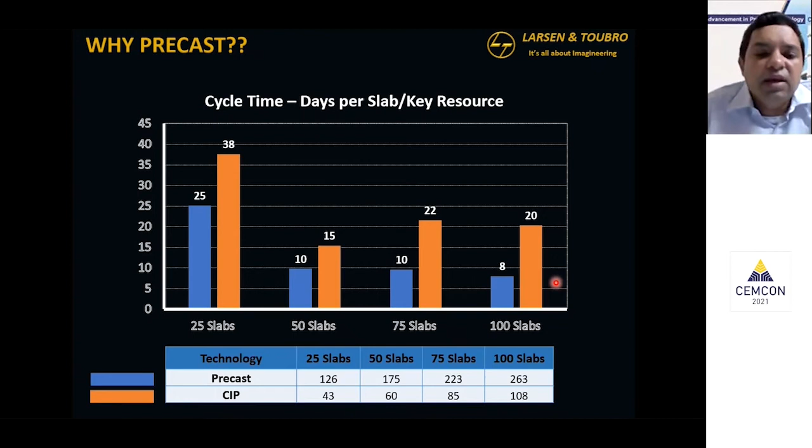What I would like to drive now is as the project has progressed, if you see conventional, usually that initial curve dips, drops, and kind of settles. And here, based on the actual COVID challenges, sometimes it has gone up also. But if you see precast, it has dropped drastically and then maintained. This is where those workforce challenges that you see at site level become less important, because once you start getting your factory productivity and all, the site challenges are less, or the site impact is less. And this is one of the key reasons why we are pursuing precast technologies - I don't want that risk of site challenges.

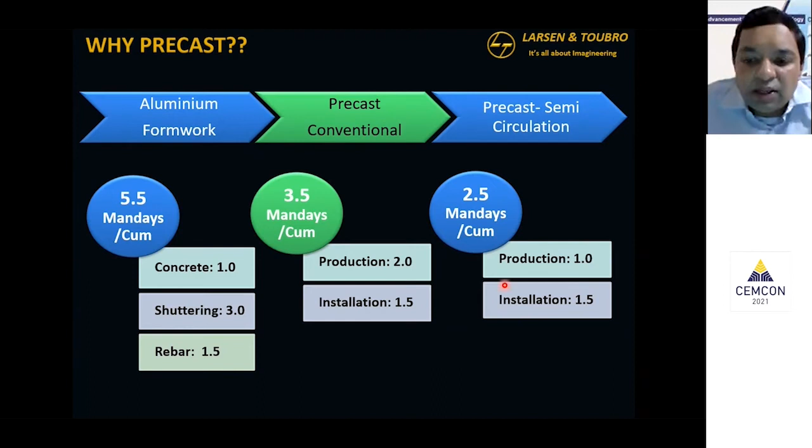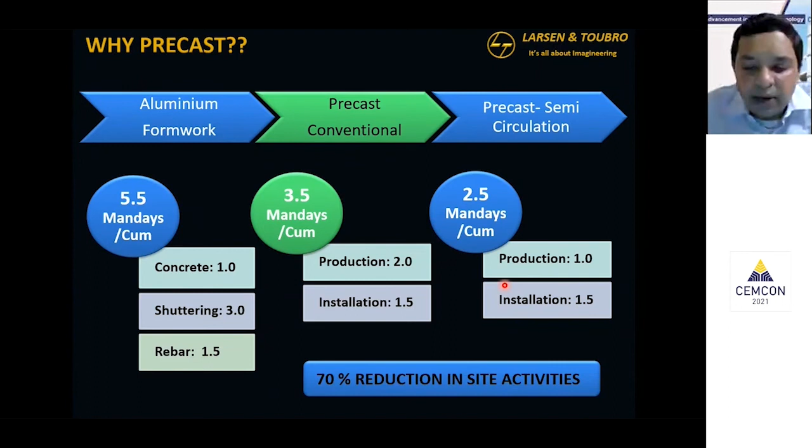If you see this other productivity metric, with aluminum formwork I'm looking at about 5.5 man-days spent per cubic meter. And of course these numbers, like 3.5, 2.5, they are better - because you are putting the technology at work, because you're putting a huge factory expense. But what we want to see is that all of this 5.5 is spent at site, whereas in these other options, only a portion of it is at site, and everything else is usually done at the factory. So again, my risk at site is what we want to reduce. The overall reduction in site activities is the goal, rather than the blanket floor cycle time metric.

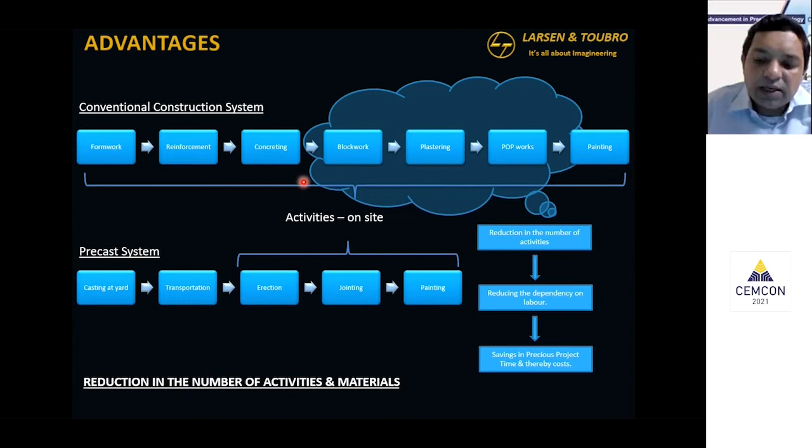This is the typical activities you see in conventional construction methods: formwork, reinforcement, concreting, then block work, plastering, pop. This is a pretty conventional cycle. In both aluminum formwork and precast, we try to eliminate workforce-intensive activities. Since 2002, with the aluminum formwork system, we have avoided these activities. With precast, whatever cumbersome activities are left, we do at the factory. So with that background, why precast? This is the picture.

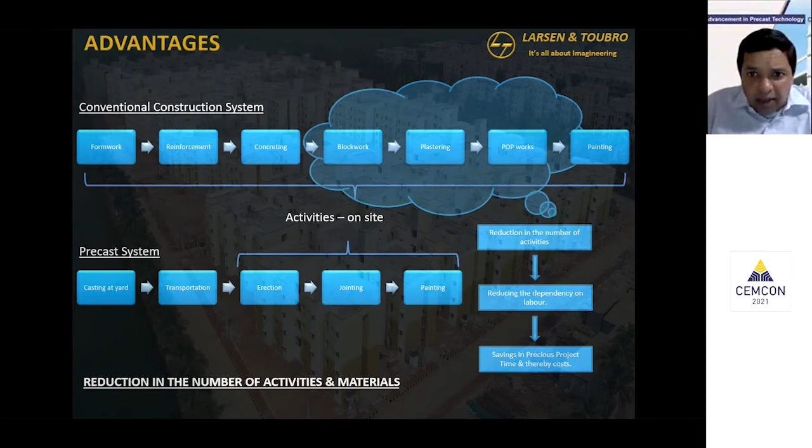This is the volume we were looking at when housing for all came in 2014 - mass housing with multiple buildings, generally of the same types, not many flat types, just huge volumes. This is from AP actually. That project included 1 lakh houses in about a span of 3 to 4 years. This is the kind of project where we look at precast technology or any mechanization - mechanization and automation is where the speed comes in.

This mass housing challenge is nothing new. We have seen this outside - our neighbors Singapore, Shanghai, Tokyo, Hong Kong, everybody has done this. They have gone through that system and built excellent public housing systems. What we are looking at is the time frame. All these have done it in 20 to 25 years, whereas we are looking at a time frame of about 7 years when it was announced, but let's say 7 to 10 years.

The other aspect, especially in residential - if you see example Mumbai, we are actually doing the latest and greatest already in the infrastructure sector. We are doing precasting that others have done for long. In Mumbai now we have high speed railway going on one side, the coastal road, the Trans Harbour Link project, metro construction. If you look at all these projects, precasting has become the core, and that has worked well.

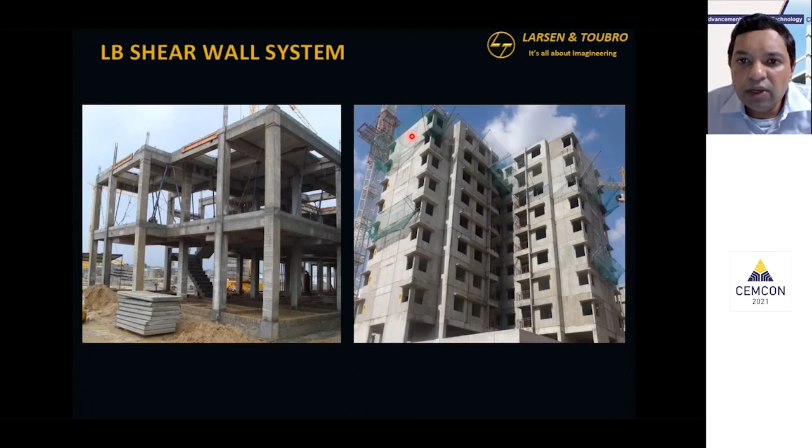The other thing about using automation and mechanization is your activities at site. If you see this picture, in the conventional system, once the floor cycle is done, only about 50% of the work is done. On the versus side - precast or aluminum - when my floor cycle is done in 8 days, 90% of the work is done. Right now in this building, externally only painting and internally only finishing is left. So that is what is driving us.

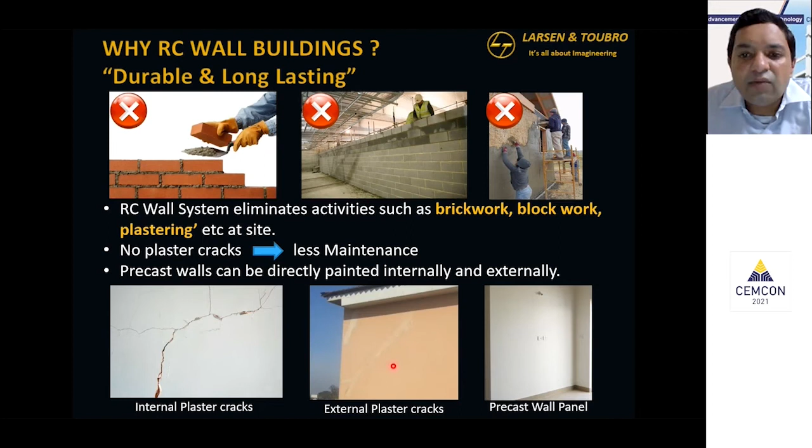From the end user perspective, all these systems avoid plaster. The one point I'd like to deliver is that from the end user perspective, all these modern technologies eliminate internal and external plaster. For us it's faster work, but the plaster was never meant to be a lifelong element - it's a sand cement mortar, it doesn't have inherent strength. You start seeing issues 5, 6 or 10 years down the line with cracks, maintenance, paint fading. All those issues are not going to be there in the construction systems we have selected.

We built three more buildings here, so about 2,000 flats were built. The building won several awards also. This was started in the 2011 time frame and then handed over around 2014.

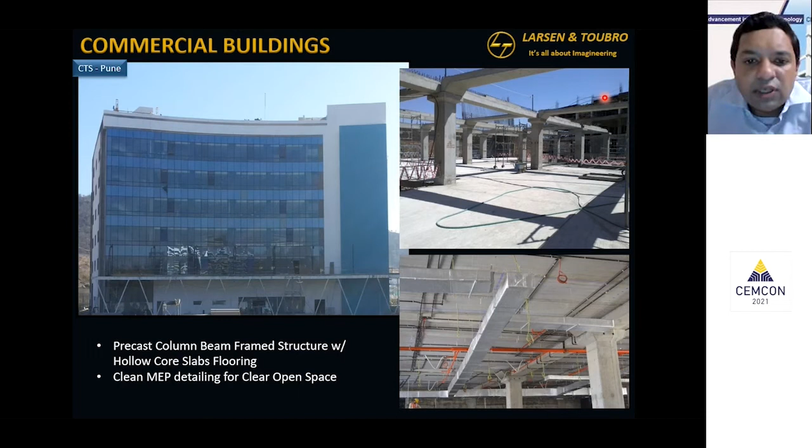This is one of the recent projects in our IKEA warehouse in Navi Mumbai. It's a hybrid structure, with steel columns and hollow core slabs to make out the floor.

What is unique is each slab is about 16 meters long, with a warehouse industrial load of about 750 kg per square meter. This is one of the longest and deepest hollow core slabs in the country, a 400mm thick slab that was cast.

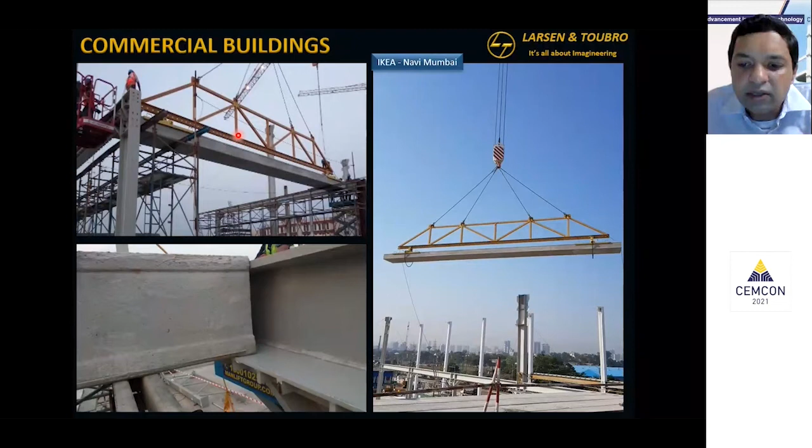So with this background, where will we go? This is the crux of the presentation today. In short summary, this is where we see the entire industry now going. There's no particular technology over the years that we feel will govern or dictate, but the hybrid technology and the prefab or pre-finished concept is probably here to stay. No matter which technology you use, everybody will be focusing on less work at site and combining systems so you get the net benefit of the overall system, without getting stuck to a particular system.

In general, market-wise, if you look at this S-curve, this is your low-rise market, which is G+1 to G+4 houses, where we are already exploring 3D printing. We have approvals and will be getting into that space—maybe by April or May we'll have our own setup actually printing these buildings. We are comfortable doing aluminum formwork in that space, but 3D printing is going to be the newer system. Same way, if you go mid-rise, we are doing precast now, but will be shifting towards PPVC, the volumetric construction, where you finish everything at the factory and erect it.

And if you see the high-rise sector, we are doing the jump to climbing formwork, which will stay. But the facade, which is usually the challenging system, we may go to precast facade or prefabricated facade systems to cover these buildings. So along those lines, we have to think and see how we go about it.

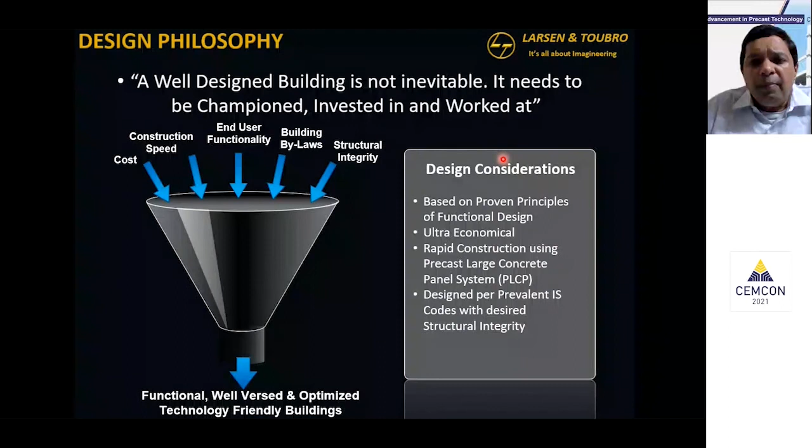Getting into the design—how we do design—we have to look at it as a holistic approach. L&T has that strength where we have our own in-house design department, not just structural but including MEP and architectural. We also have the construction method services team, so that one single point of contact gives you the entire solution from land development to actual construction and handing over of the buildings.

From the design perspective, we look at two systems in precast. One is the large panel system, what you see in the picture, which we usually use for residential construction. The other is the framed system, which is what I showed in the commercial projects—usually precast beams, columns, and then hollow core slabs or double T's, the long spanning system.

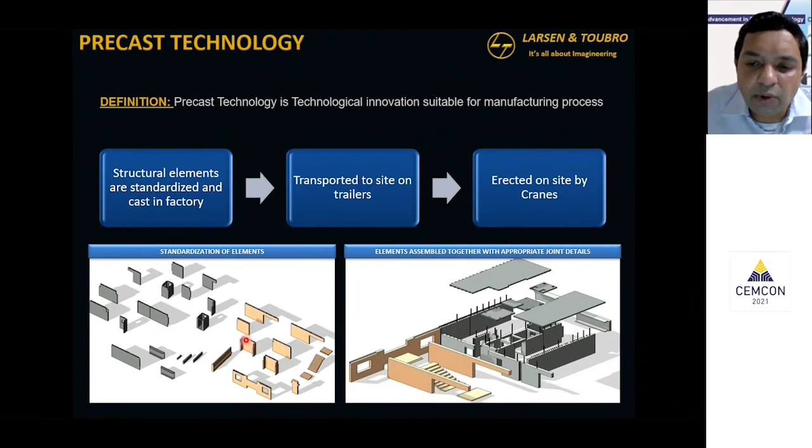Once you decide that system, your work is fairly straightforward—it's not rocket science, you just split your elements. For floor plans we don't have much luxury; residential especially has its own taste. Outside projects are very simple—buildings are usually boxy, modular, in grid. We don't have that luxury, so we worked with it knowing our buildings will be complicated. We look at complicated elements, break them into two-dimensional elements as much as possible, produce them at the factory, and then erect them.

With that basic framework, a lot of times designers or clients will ask: how much precast should I do, what should I do in precast, whether I get the benefit or not. Looking at those questions, as engineers we try to split it and simplify—so we made it into a 2 by 2 matrix: what are the benefits I get, and what are the efforts I put in? If I want high effort and low benefit, that's something like a premium—like, I have to do precast, so I will do precast.

If you have a high cost efficient system with lowest effort, that's your bread and butter type, and it will make sense. If you're low on both, maybe you're doing precast, it doesn't matter. If you're high effort and high benefit, you will have to do something like that.

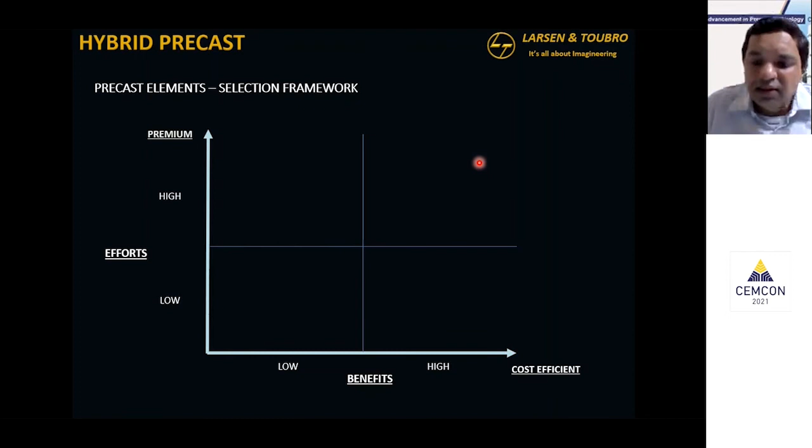So in general, if I start splitting the construction systems, this is what you will see in your day-to-day buildings, whether commercial or residential. If you have external complicated 3D elements, these are high effort elements, but you get high benefits, right? You get an easy 3D facade attached to the building and save a lot of time. Same thing with pods, stairs, or external walls. It's really worth looking at these elements and seeing if you can convert them to precast.

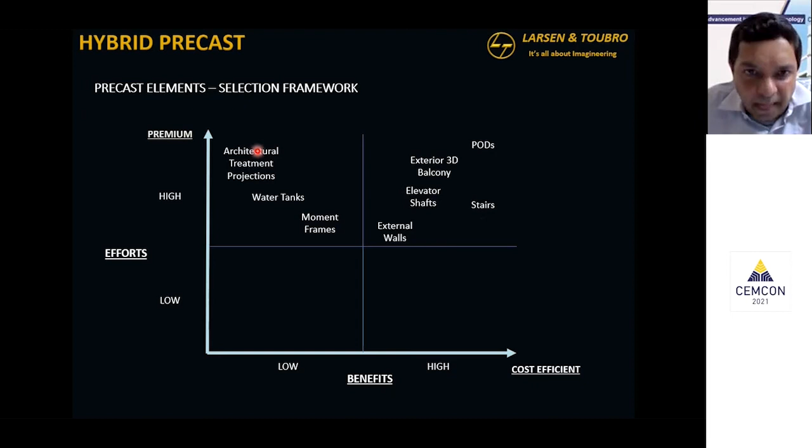If you look at architectural treatments and projections, they look fancy, but you end up with very high effort and not as many benefits. So in our Provident job, for the architectural treatment, we used an alternate material. We did not force our technology there.

Same with water tanks — there is a lot of high effort involved. You have to have a really premium drive to do water tanks in precast, which in our CIDCO projects we are doing, but for different reasons. Believe me, to build that water tank, there is a lot of extra work to make it work.

Columns and beams are very simple but offer no real benefit. Internal walls and slabs — slabs actually give you the highest benefit element from precast, where you don't have to spend as much or put in as much effort. Simple slabs give you the benefit of no formwork, and you can quickly put the slabs in, exactly like what I showed in that IKEA warehouse.

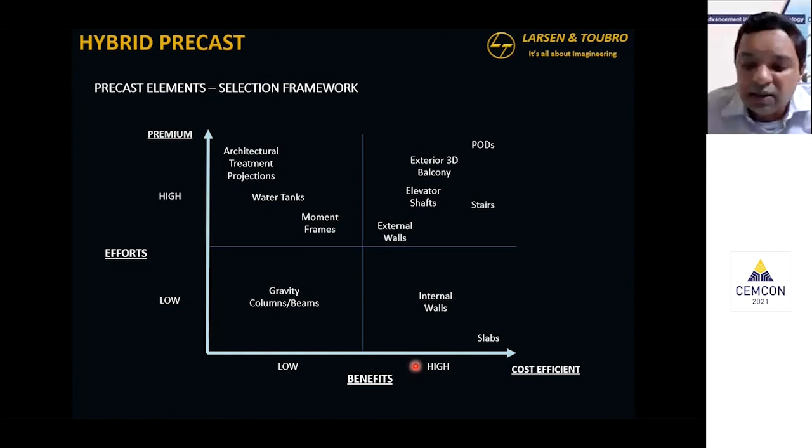There is no formwork, no false work, in long span areas — literally 50 to 60% improvement in overall productivity. So on those lines, you can make your own 2x2 matrix, see what your benefits are, what is driving you as a client, contractor, or end user, and then decide what kind of precast you want to do.

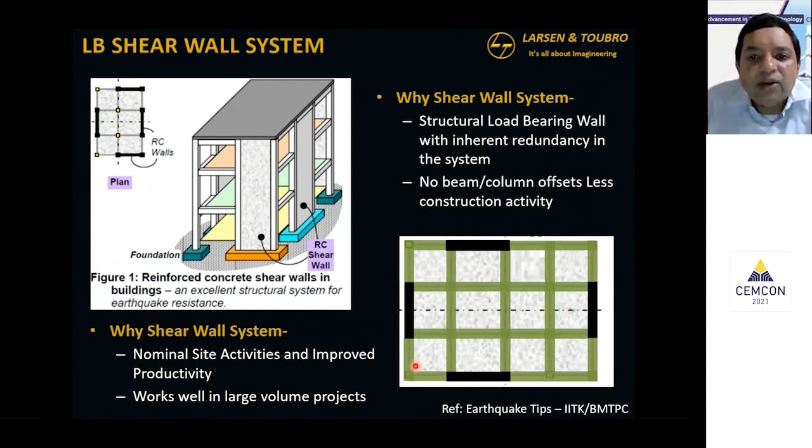Once you take that call, whether for the entire building or not, you get into your structural system. What we are doing is emulative detailing. This is one slide summarizing it for those in the structural design department. This is what we're using in India now, whether it's a beam column system or a large panel system for residential or commercial buildings. We are using the emulative approach.

The outside world has been doing bolted and welded connection approaches for the last 20 years. Before I came back to India, I didn't know what emulative detailing was. I had always seen welded and bolted connections when I started work. But maybe we'll get there one day.

Right now, where we stand, the system is working well for us in terms of these wet connection detailings. The bottom line of the emulative approach is that once your building is completed, it's immaterial whether it was done in precast or conventional — it behaves similar to a conventional, monolithically cast building. That's the kind of connections and detailing we are doing.

It requires a lot of extra effort — wet concreting takes a lot more time than welded or bolted connections. That extra effort is to get the performance similar to what we are used to, and it's a globally accepted methodology.

If you see ACI, they say the buildings will perform equivalent to your structural system. PCI takes it even further, saying regardless of any seismic region, if you are doing emulative detailing, your building is going to perform very similarly.

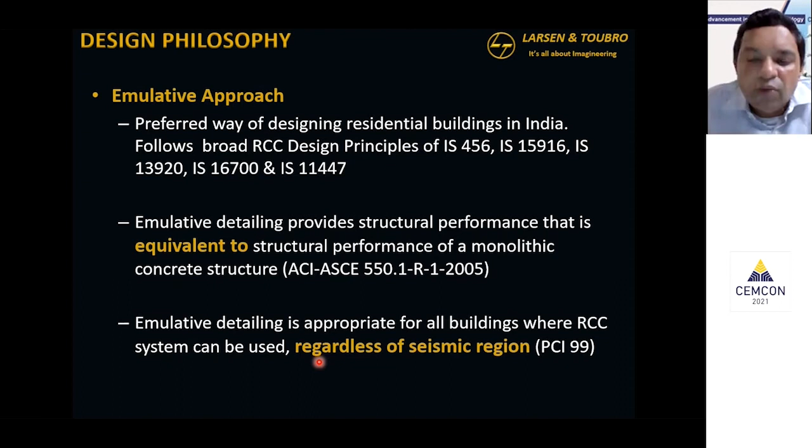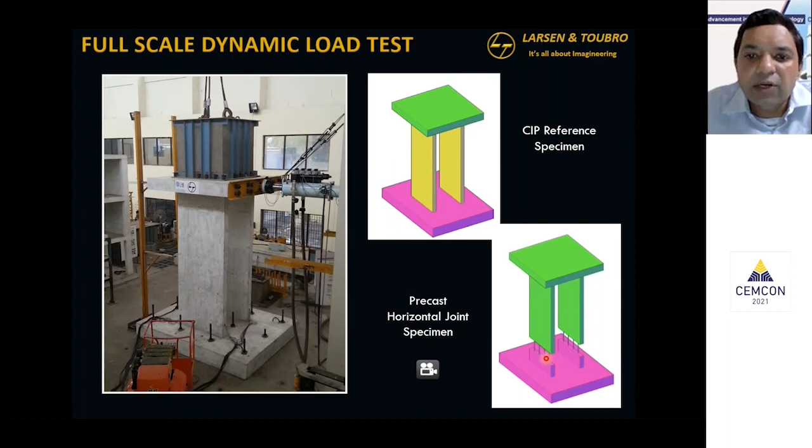And just to validate that, we did our in-house test. I won't get into all the details since we don't have time, but the entire test setup was done in India, where we validated it. This is a full 3 meter height shear wall system, pushed with reverse cyclic loads to make sure the emulative detailing performed as expected. One element was cast in place, while the others had three different joints, and we tried to see whether that emulative or similar performance was achieved.

If you look at this graph, one of the walls is your conventional wall, and these are the precast walls — so we do get similar performance. The R values, our overall strength and toughness, are similar.

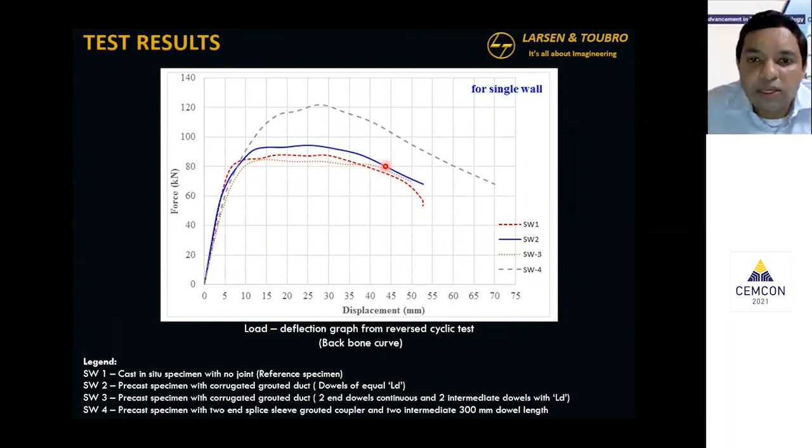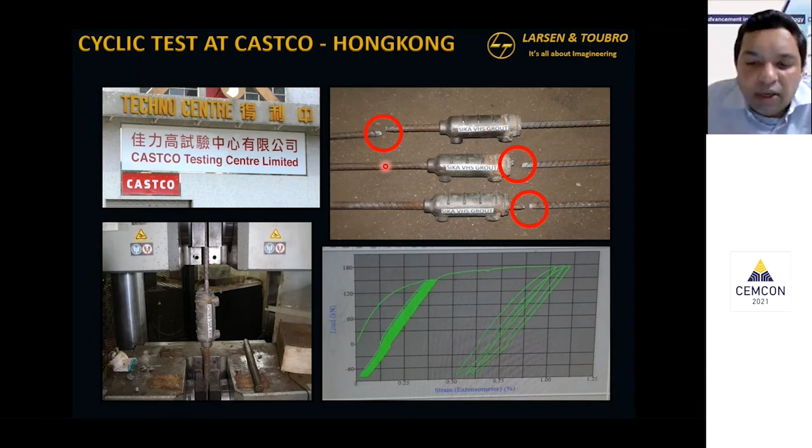Especially for the connections we use for couplers and all, that was also tested, and the couplers usually give slightly better performance. But of course, they have their own detailing issues, or it takes a little more time to build the elements at site too. So that cost benefit you have to evaluate on your own and see.

But ductility is mainly where precast usually gets questions, whether you get the same performance or not. This is actually the proof of the pudding. If you see these coupler connections, this has been tested at a seismic event of more than zone 4, and the bar has yielded, giving the ductility that you want. The connection never failed, and that's how you get that better performance out of it.

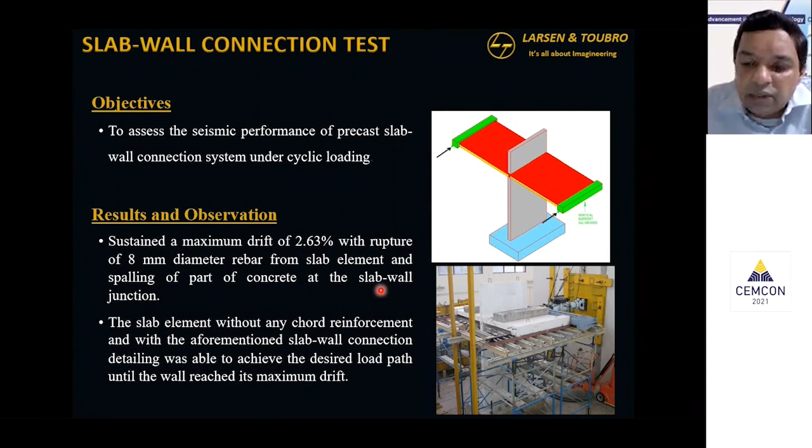On similar lines, we have done all other elements also. The entire building structure, building system, or building load path has been tested and validated for the details we are using, to show that we get satisfactory performance in terms of shear wall connections, diaphragm behavior, and connections that give you shear capacity.

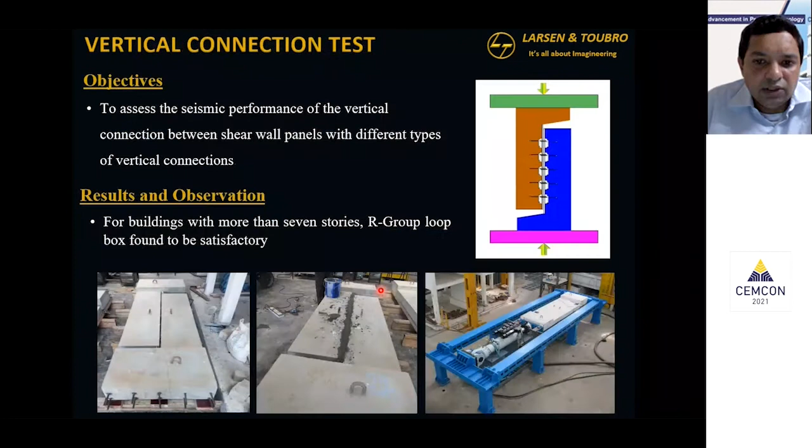Based on that, we have several technology validations and certifications in place, just so that you have that comfort. In 2012, when we were saying okay, new technology, we have to do something - from that to now, the industry overall has seen a lot in precast, and that comfort, that confidence we have is plenty there, where we don't have any issues left to deal with, especially in terms of structural or joint connections.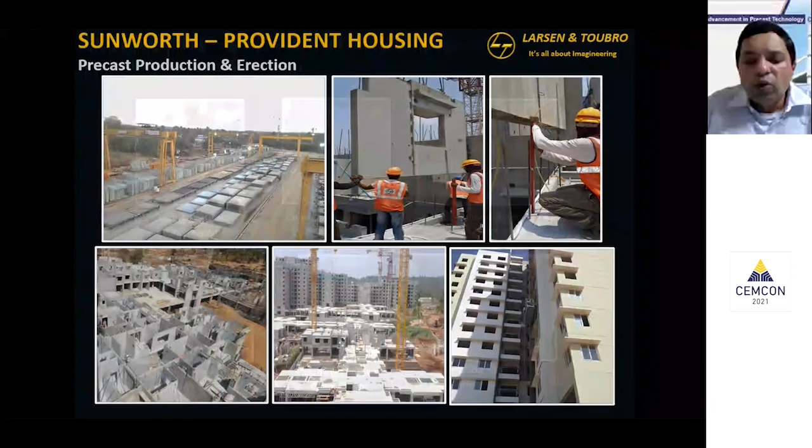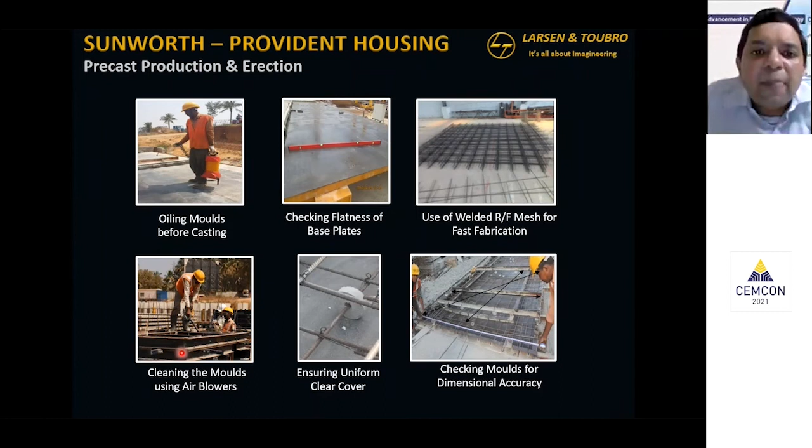Your overall quality control is going to be much better in terms of everything happening at ground, right? There is something happening on the 23rd floor versus something happening on the ground in a factory controlled environment, which is much better. As far as the conduits or your services are concerned, everything is concealed, so you get that same benefit out of it. Conduits are usually cast embedded in your PHE plumbing. Usually we provide chases so that you get access, so that if at all it leaks and all, you can access it and maintain it.

Your transportation and all is figured out. That becomes actually one challenge.

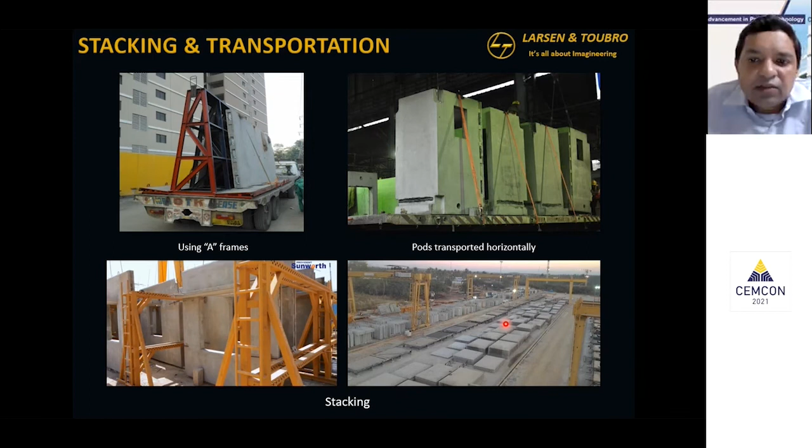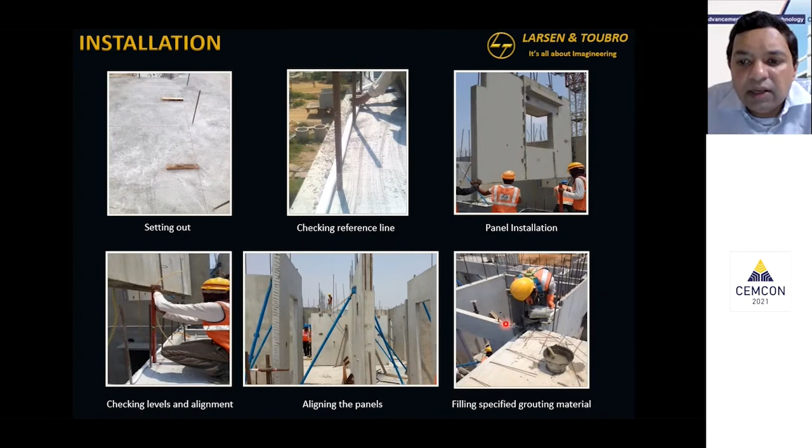Usually we avoid infrastructure challenges by setting up the factories at the site itself. So that infrastructure challenge, I don't have to deal with it personally, but it is there. Maybe in another 5-6 years we might be seeing better infrastructure to deal with the technology better. Once it goes to the subcontractor, the 10-15 gang, they know what to do, and it's very minimal work - just line level, make sure your elements are plumb, and continue erecting. It's a fairly straightforward process, as long as it's dealt with well during the design stage on paper.

I think I have about 15 more minutes, so going to another one quick. This is a very small project, but I just wanted to give the audience the flavor of how you can adopt technology.

Usually our focus is on mega projects, but every now and then you get a small scale one that fits in precast. This was one hostel building we looked at in precast - the building was G+3 because the client wanted it in 8 months, and they said if we build all 5 floors we'd be late, so just give 3 floors plus 2 extra floors. By the time we started construction, looking at the speed, they said we might as well build all 2 extra floors and not be late. So we built all 5 levels and got that structure in time. But why is it unique?

To improve speed, usually we start on the ground floor. But here, because the founding strata was low, even the plinth was taken up using precast. This is my raft - at the start, top of the raft, we directly took up precast. This plinth work, which usually takes about 25 to 30 days, was erected in 3 days, and then backfill and all in about 7 to 8 days, and the work was done. So this is where you get the speed of the technology.

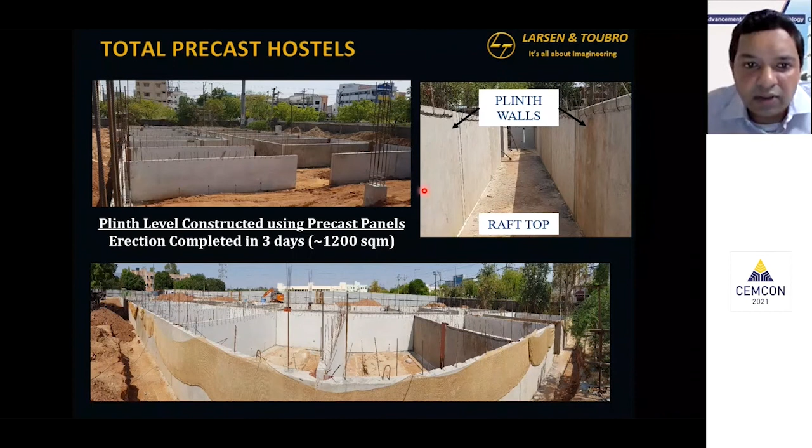Then inside the building, again finished well, you don't see it. The bottom level was a big dining hall, so the continuity of the walls could not continue. So we did a hybrid system of beam-column portal frames - this is precast beam, precast column, and then the building continued on top. So if you look at it, various possibilities are there which can be easily done using the precast system, and much faster.

This is one commercial job in Vizag. Now we are doing a substation building - this is total precast substation. This project is about 15,000 crore worth, and the substation building is about 50 crore. But the substation building is kind of the heart of the entire project - until that is commissioned, nothing else can be handed over. So it becomes an important and critical element. The client said they want it faster, they don't want the risk, so that's how it was conceived. This is one of the first substations we are doing, but going forward we will see more and more in that same space.

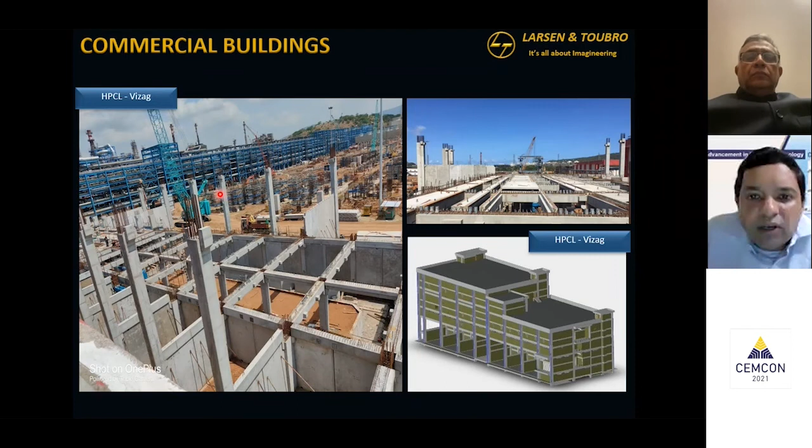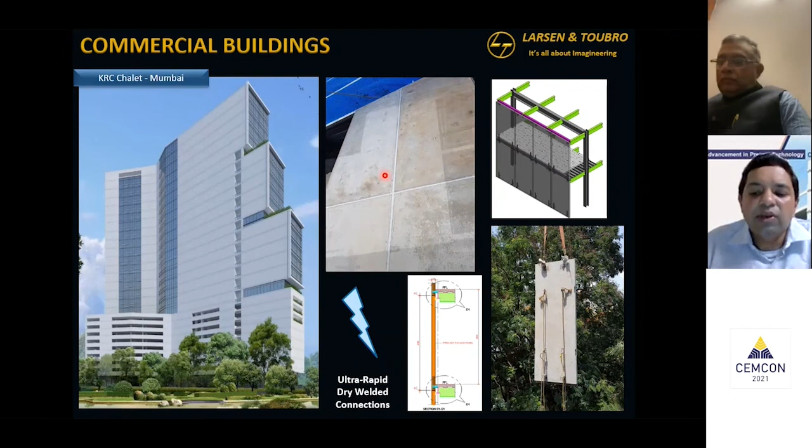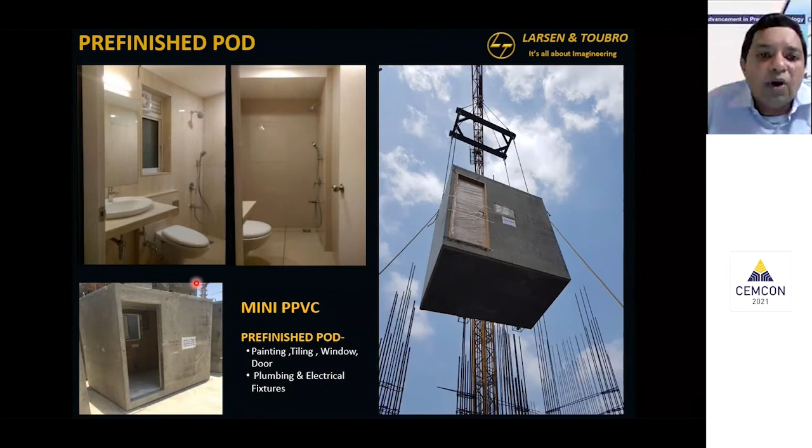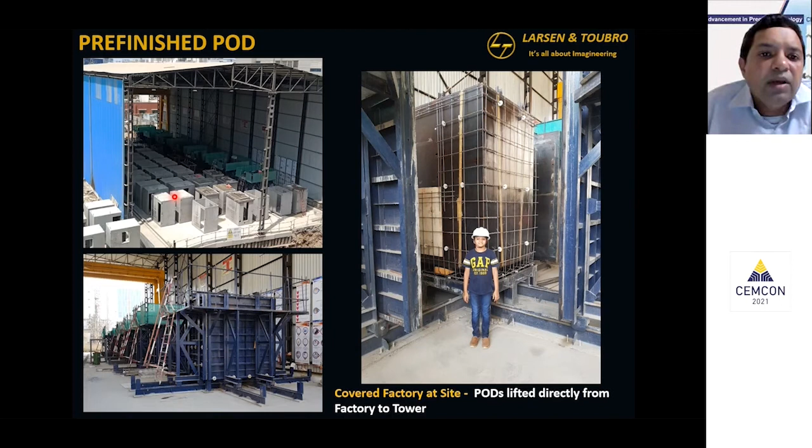Same way, here we are doing in residential this pre-finished pod. So if you see this toilet, about 10 ton including finishing, but all this finishing is done in the factory. We set up the factory right next to the job, with all indigenous molds from our own formwork department. These pods were stored at site and finished on ground, saving on the overall finishing activity at site. The toilet pods were just kept constructed with the building, and at the time of handover those were opened, with only the door attached fresh.

So with that, I think we are at the last end, maybe another 10 minutes. What we'll be looking at is overall QAQC, what we are doing, and joints. We already discussed about the structural integrity quickly and how we are doing it.

In terms of joints and water issues, what I would like to stress is, as long as you know what you're doing, as long as you look closely and detail that joint out, it is very possible and very comfortably done to have long lasting buildings which will not have water leakage issues.

In terms of the water leakage issues in general, where I stand now, my experience over the last 10 years is that in India we don't have water leakage issues in precast anymore. I have a water seepage issue, I have a moisture issue. But what we were seeing when we started this technology, where 10% of the joints were leaking and there was dripping water, that has gone. What I'm looking at now is probably less than 1% of the joint issues. Even with that, maybe a moisture or seepage issue, but there are no drastic water issues.

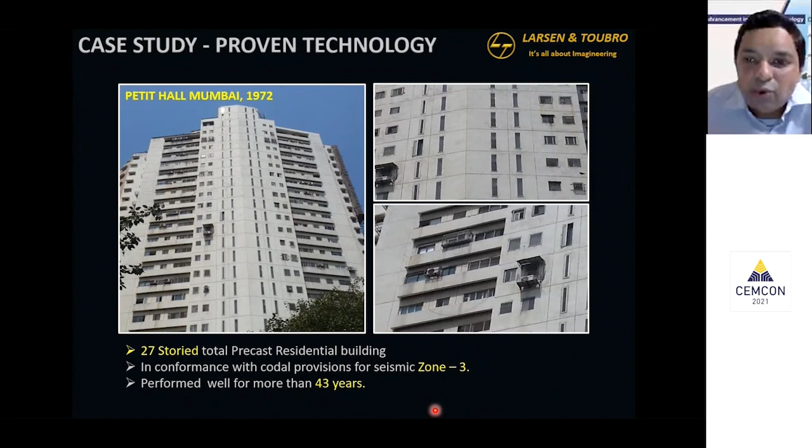The building you see in the picture here is a total precast building done by Shirish Patel and Associates in 1972. The building has been standing there for now more than 43 years without any significant issues. So if you know what you're doing, if you pay attention to details, it is very possible, highly possible, to build buildings which will be standing for 50 years or more.

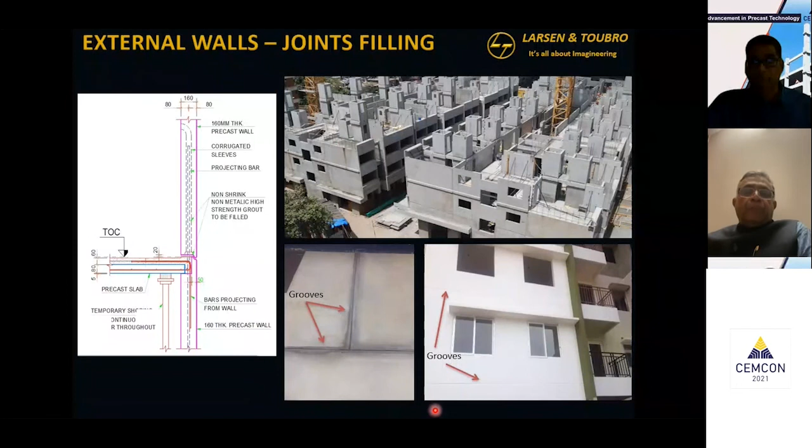So how we do it, we have also evolved over the years. These are some of the typical details, how we do the detailing, where you avoid and make sure that water does not climb up. We do waterproofing with an intent where there should not be a leakage from one room to another, forget one flat to another. So all these details we look at and finish.

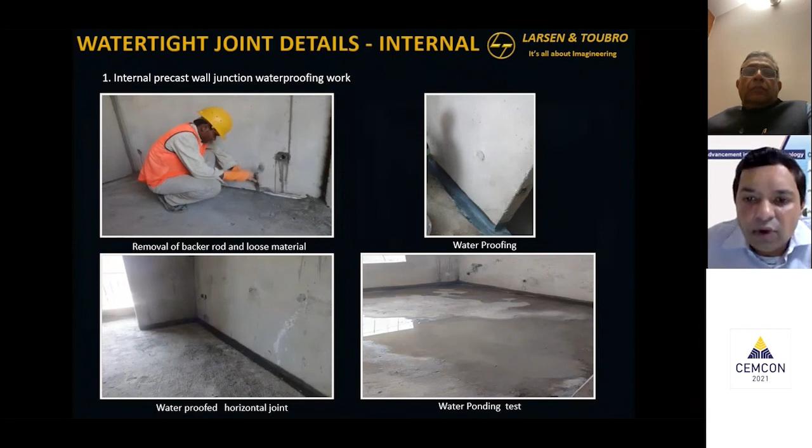After finishing, these will be tested also. About 2% of the flats, we are actually literally ponding the flats with about 4 hours of water and making sure that the vulnerable areas are found out. If there are areas with seepage, those get treated, but this is being looked at.

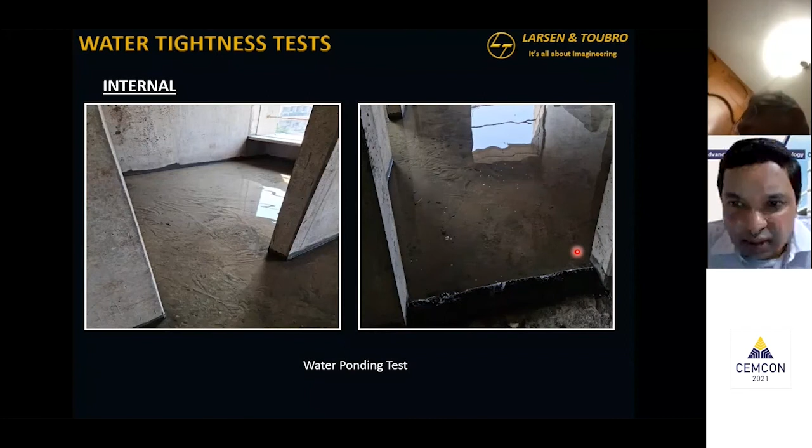So this one thing, I'll just take a minute or so, but I wanted to put it because that question keeps coming. So here's a small video from our recent project in Mumbai, where we actually pond the flats. We ponded this flat also for about 4 hours of water.

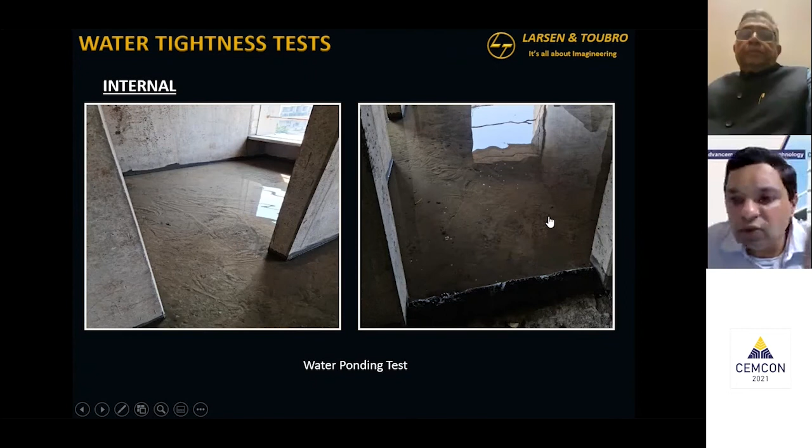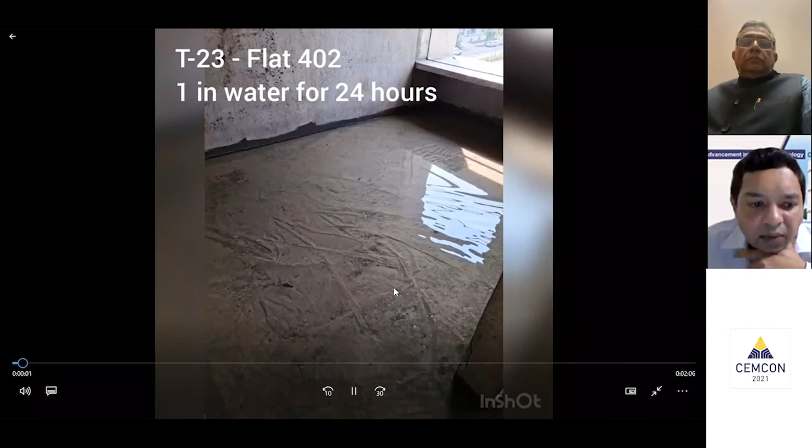And then there is a walkthrough of what you get to see under that flat, like the one level below. And this is what we are actually getting now. That's where the confidence comes from, when I stand here and say that I don't have a water leakage issue, only a moisture issue.

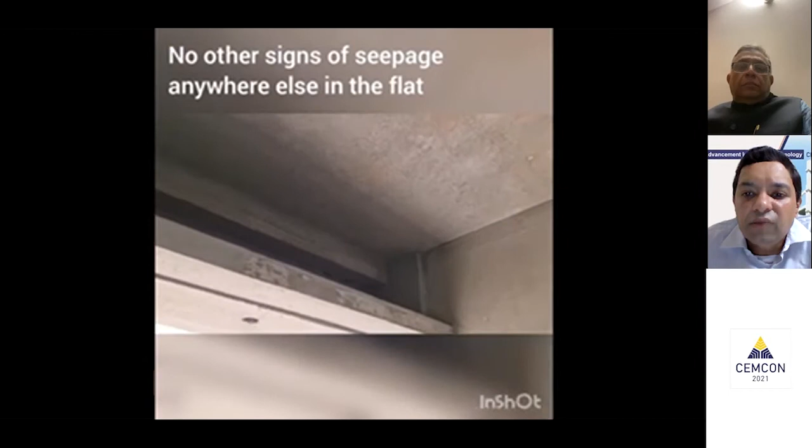The entire flat is usually flooded, like I said, for about 24 hours. That's the new norm, and this is anything beyond that. We have perfected that technology where we can confidently deliver these kinds of units. All these joints you see, this is as good as looking at a water tank below, which had 1 inch of ponded water for 24 hours.

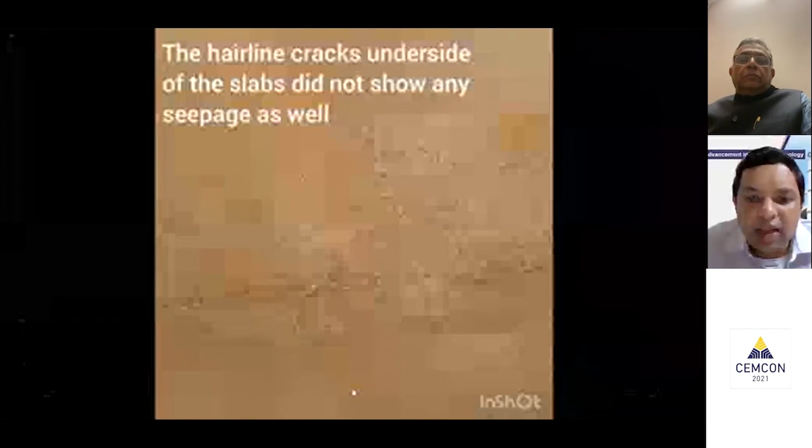This also, you see, it is very common in precast slabs to see some hairline cracks and all, because these are thin slabs, and usually everybody is concerned saying these cracks will leak and all. But once you put the topping on top of it, these cracks usually do not have any issues.

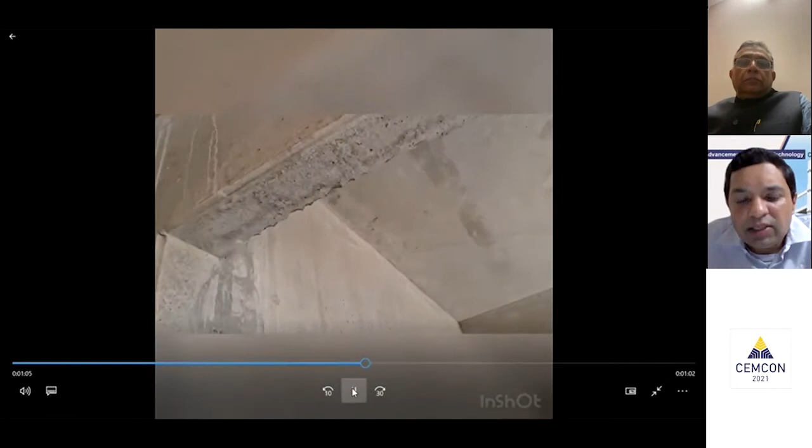So that's the entire flat going out, and sparkling. This is what we can deliver. One, attention to detail during design, and then make sure that your QAQC at site is working well, where you can achieve this kind of performance.

All right, going back quickly. Same way internal, we are doing external testing also. So if you see now, the newest code 15916, which is the precast code, has now given requirements for the external joint testing also. So the same is followed, where we do kind of simulate the rainfall situation and test the joints to make sure that they are

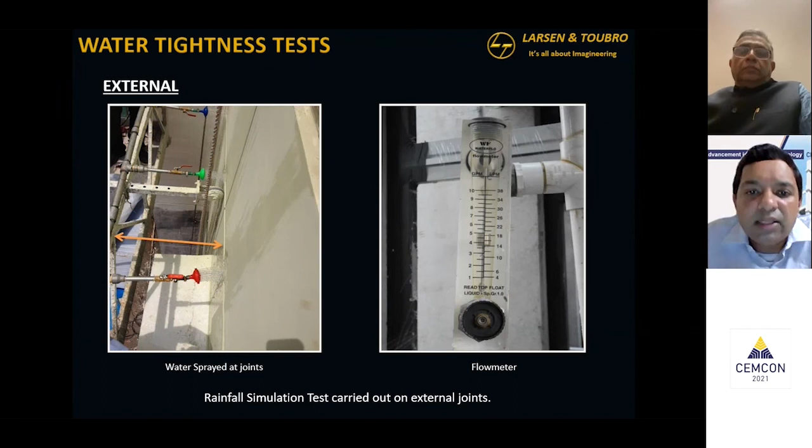as expected. Right. At the last end, I'll just show, I think the video that you saw just now is from that CIDCO project only. So this, we are building actually about 7,400 houses now. Based on all our experience, we selected precast technology for this.

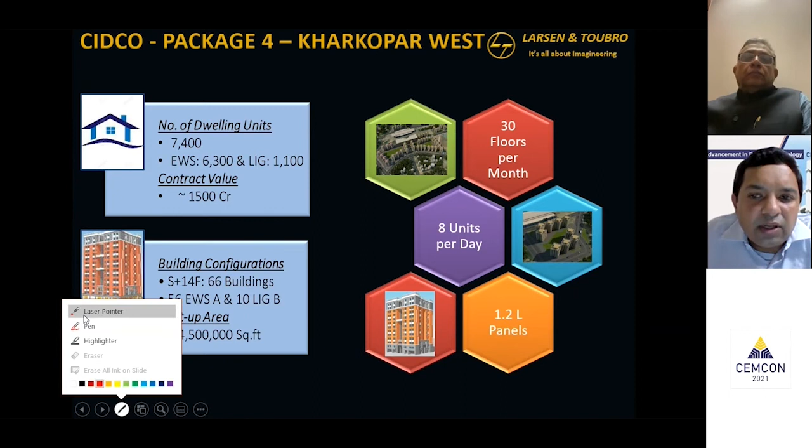Also, it was qualified by CIDCO as their preferred choice of construction. And we are looking at about 4.5 million square feet of work. The speed overall, if you look at that, we are looking at about 30 floors per month, which will translate to about 8 flats per day. So that's what we are looking at in terms of volume.

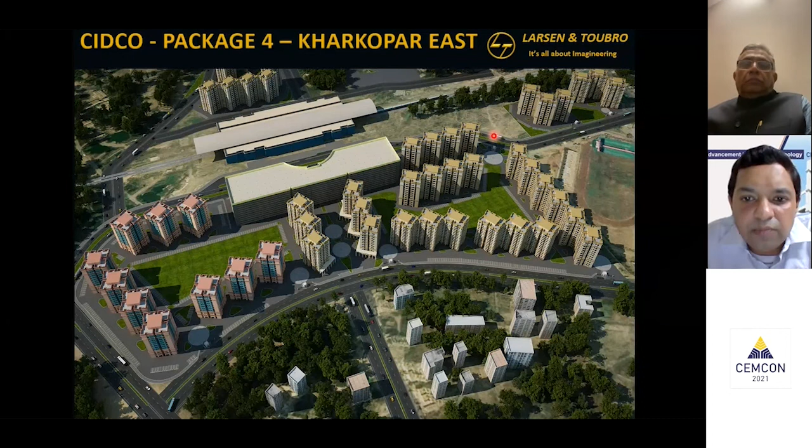This is the overall perspective of one of the plots. So all these buildings, what you see, we are building using precast technology now. The architect is architect Hafeez Contractor. So these are not your traditional mass housing type buildings. They wanted, they were very particular about their brand. So if you see there, all the grooves and reveals and projections and all that was worked out, and the entire thing is being produced in the precast system along with the architectural features.

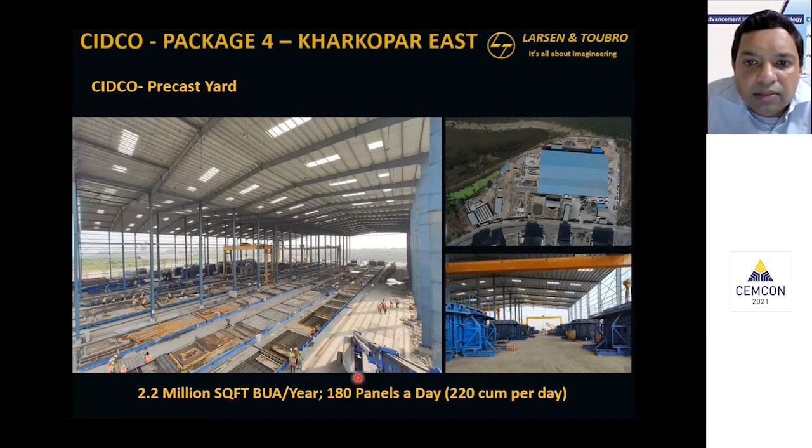This is during construction. This snap, it was built right in COVID wave 2. In starting production, about 2.2 million square feet a year capacity. 90% of the molds are built indigenous, and this is what I was showing the panel. If you see, with the grooves, with the bands around windows, everything is cast at factory. Even the first layer of paint and putty, we are trying to see if we can do it in factory and just install it at site.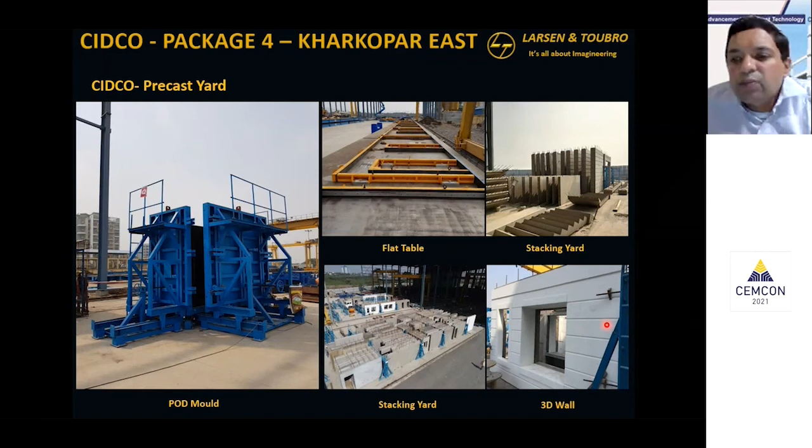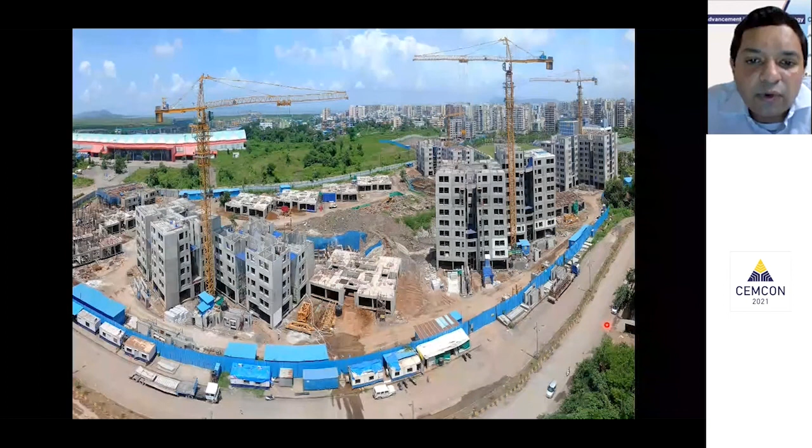This is actually the site photograph. What you see here is pretty much built in the last 7 months. So that's what we are looking at. This photo itself is about a month old photo. But that speed, what I was saying, about 30 floors a month, we are somewhere around 22 to 24 floors a month now. At the peak, we will get to about 30 floors a month using that plant speed.

And to conclude, then in the digital space, what I was mentioning - if you look at this project, whatever I mentioned, 4.5 million square feet, it broadly translates to about 1 lakh elements. And it's a huge amount to deal with in terms of your planning, logistics, and all. So what we had previously,

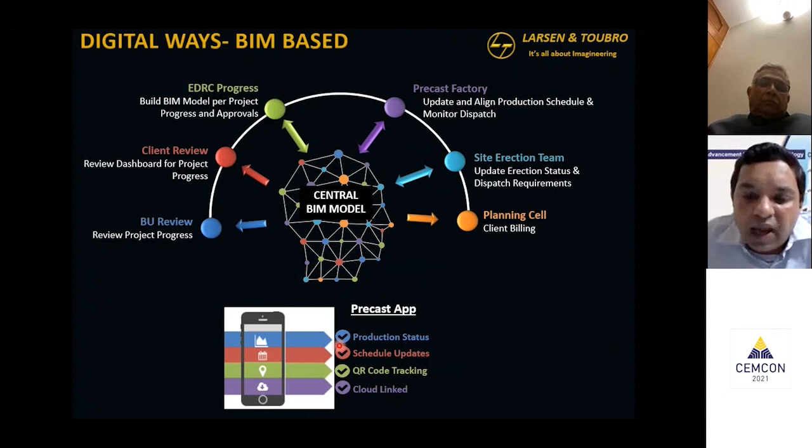Excel based planning and all will go for a toss if you want to kind of track these many elements. So right from the project start, we are now full-fledged using BIM for all, most of our projects anyway. So there is a central BIM model for all these towers, and based on that BIM model, now we have our in-house app also that kind of tracks each element status-wise, right? So from the BIM model, I am already doing the modeling. If you see all the reinforcement of these panels, everything is modeled in that BIM model, right? All my 2D drawings are generated out of this BIM model now. There is no more 2D drafting going on.

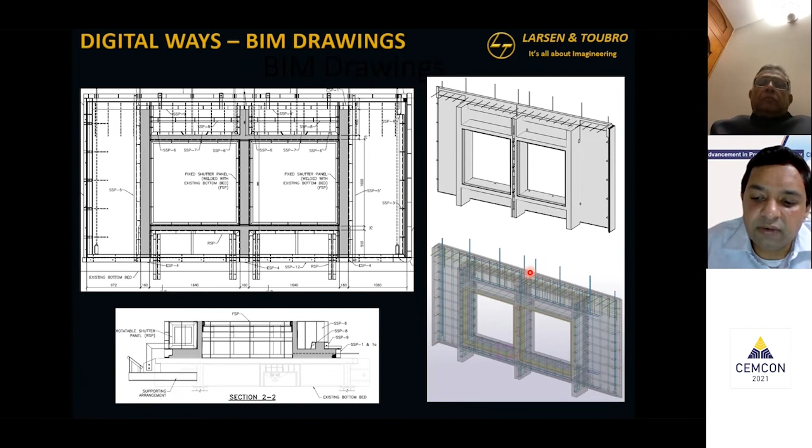And once you have that in hand, then we switch to the site digital action, which is our app. Then right from the start of that project life or element life cycle, when the bed starts, we know that this element is being cast. Then at what time it was cast, how much time it took to get to the concrete stage, when it was demolded, what was the strength at the time of demold, how long it was in storage, when it was transported, when it was erected at site. I have a real-time snapshot using that app. That's where the digital advantage we are looking at is.

Usually what used to happen in traditional tracking is by the time the issue is flagged, it becomes 2 or 3 days delay already, because someone is going to input punch in that number the next day morning, look at it, then they realize that's a problem, they will email it, then people will start looking at it.

If at 8 o'clock in the evening the element is installed, it gets scanned and reported saying that element is installed. If it was not, it gets flagged also. So I get a real-time snapshot throughout the project all the time out of whatever that 1 lakh elements, how we are doing on each element.

Same way, tower progress also. We get to know using that app how many towers are doing each floor, at what percentage it is, and everything is being tracked real time. So that's the digital advantage.

And then lastly, to conclude, where will we go? I know I've been rushing a bunch of things, but feel free to contact me if you have questions. With all this, last 8, 9 years, where will we go? I just wanted to show some pictures we have done in India, and before coming back to India, I used to work with the precast sector.

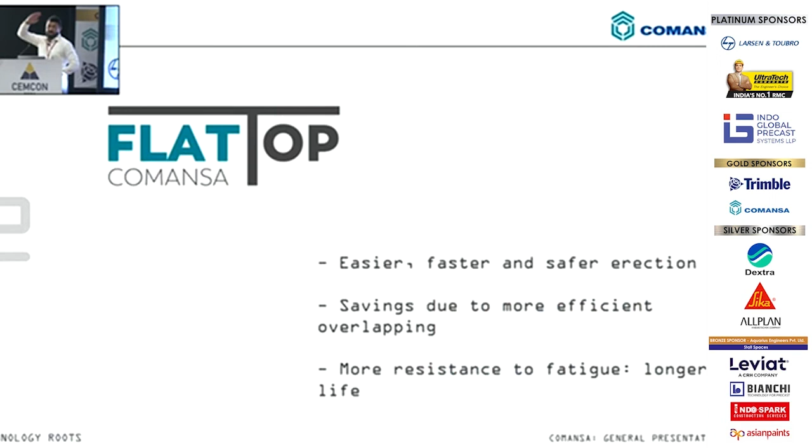As I mentioned, Comansa is the pioneer of flat top technology in tower cranes. Flat top cranes have a lot of advantages over hammerhead cranes, or cranes with a cat head where the main jib is supported by slanting ties. Flat top also allows part-by-part erection and dismantling with the smallest possible mobile crane.

Also, the challenge of tackling higher capacity panel weights is quite significant in precast concepts. Hence, in precast concepts, only smaller capacity jibs are used to tackle the heavy panel weights. Being a flat top, if a few cranes are working in close vicinity to each other, they can overlap with each other at the shortest possible heights.

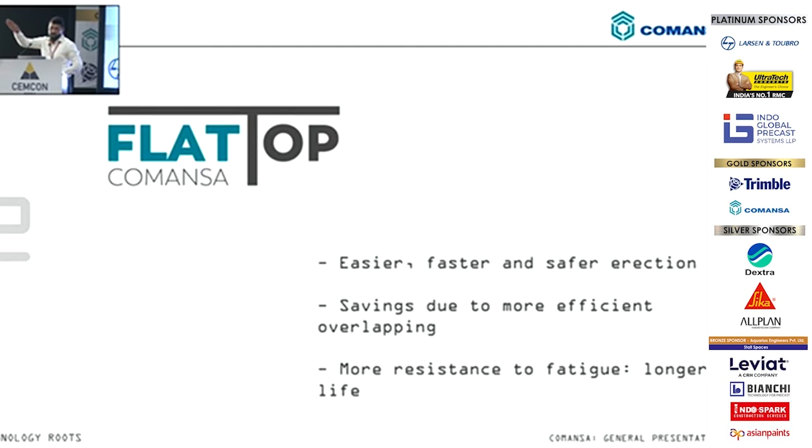This is about more resistance to fatigue. As you may know, in cranes where the jibs are supported by ties, the portion of the jib just beyond the ties is most vulnerable and experiences the most impact while lifting heavy loads. But since a flat top crane has no tie, whatever load is lifted at any span, the impact is borne by the entire jib length rather than a particular section beyond or within the tie bar.

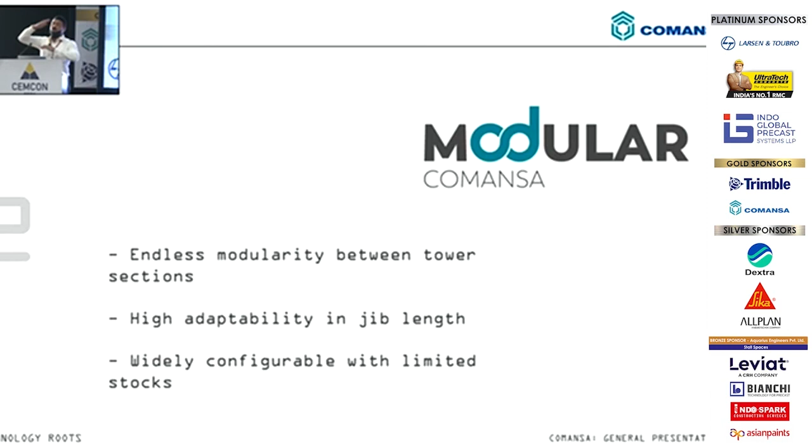Also, the advantage of Comansa design is greater interchangeability of mast sections as well as jib sections. If you have a 10-ton crane and tomorrow want to reconfigure it to a 16-ton crane, with minimum change of panels and jib sections, you can convert your existing 10-ton crane to a higher 16-ton capacity crane. These are the common advantages of Comansa flat top tower cranes.

Quicker and safer assembly. Storage is easy because all the mast sections can be further sub-dismantled into panels, so more panels can be transported in a single flatbed trailer, saving huge transportation costs.

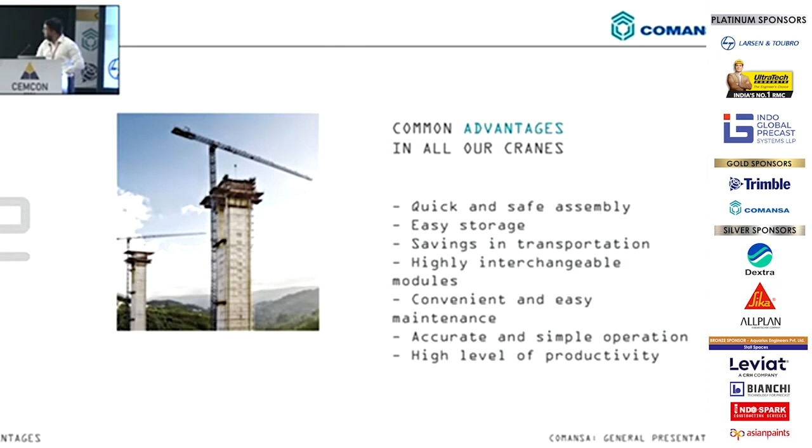Also, a great advantage of the Comansa tower crane comes when working in precast, tackling heavy panel weights. While placing as well as lifting the panels, inching control is required to ensure safety while placing heavy panels and while lifting them from the factory or from the loaded trailer. These are some unique features I'd like to share about Comansa tower cranes.

This is a double trolley. As you may know, all tower cranes have a double trolley system, where both trolleys can be split according to working requirements. But the advantage in Comansa is that splitting these two trolleys can be done automatically by press of a push button. It takes 2 to 3 minutes for an operator to change from two trolley to single trolley operation and vice versa.

Second, Effi Plus. Sometimes we have to work with the tower crane under height restraints. The Effi Plus is a mechanism where when the operator activates this switch, the speed of the crane comes down. The variable frequency drive knows the crane is working at a smaller height, so there's no need for higher speed since there's a greater probability of accidents. The operator activates this switch, which ensures the crane speed automatically comes down from fifth speed to third speed, making it safer to handle construction work.

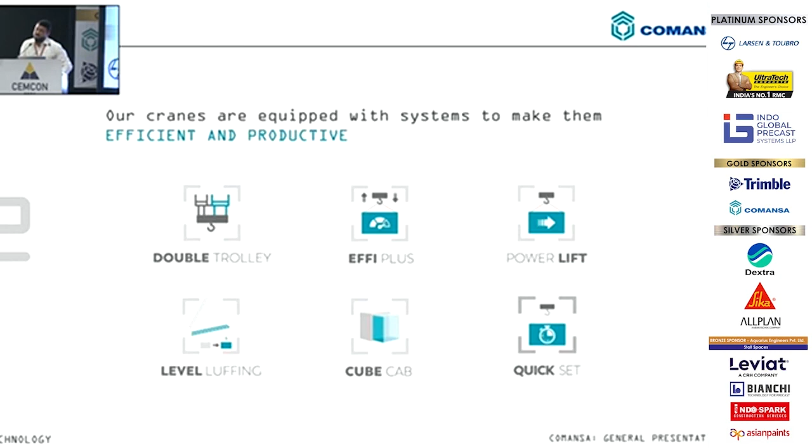Then there's power lift. This is a wonderful feature in Comansa tower cranes. Suppose I have a tower crane with a lifting capacity of 5 tons at 50 meters. Sometimes a challenging situation arises at sites where the customer requires that 5 ton load to be carried to 51 or 52 meters. The Comansa cranes, due to their modularity and design, have the option of an additional 10% more radius to be achieved with the same load. That 5 ton load, which is not supposed to go beyond 50 meters, can go up to 55 meters.

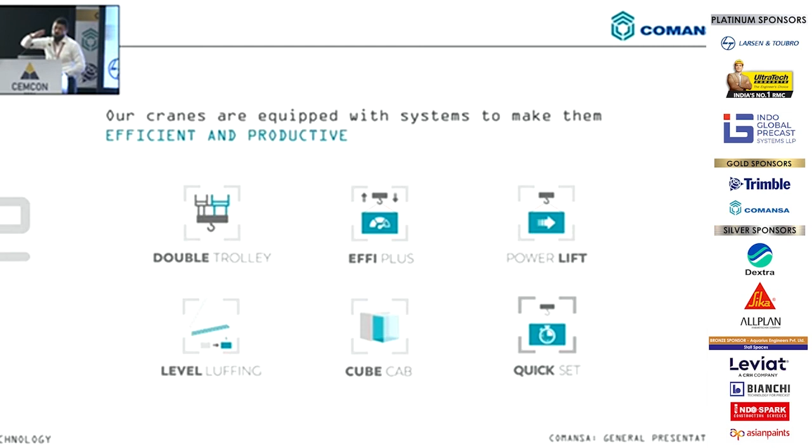Then there's level luffing, used in shipyard applications where the load has to be kept constant while the jib needs to be luffed up and down. Then cube cab, this is the red dot awarded cabin of Comansa. And quick set—as I told you, Comansa has the feature of inching control. While fitting heavy panels and making connections, very fine inching control is feasible. It's in the hand of the operator just to push a button. The moment he pushes this button, the frequency drive brings the speed down to dead zero, making it very safe to place the panel and grout it.

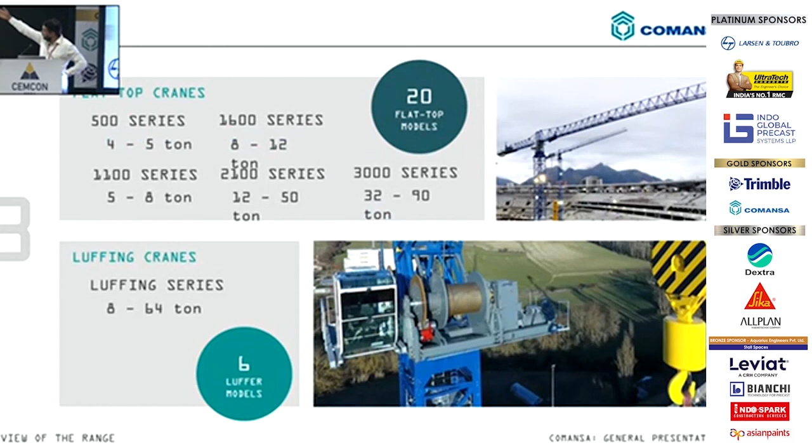These are the range of Comansa tower cranes. They manufacture from 4 to 90 ton capacity. The 3000 series includes tower cranes from 32 to 90 tons. Also, they have luffers from 8 tons to 64 tons. The rest of the medium range is from 8 to 12, and 4 to 5 tons.

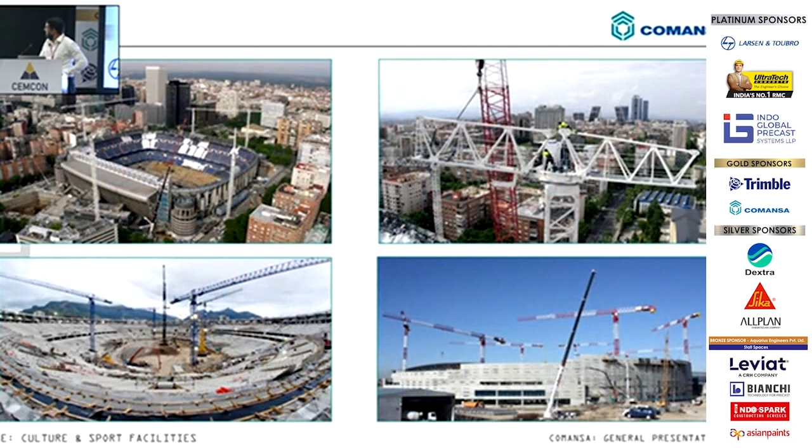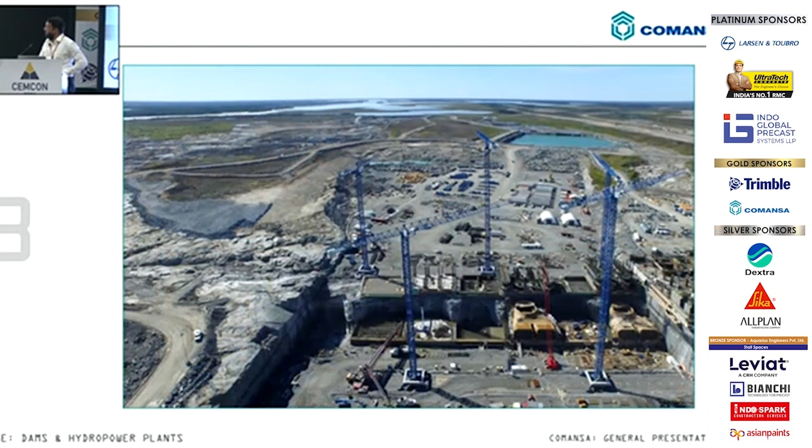These are some of the projects: commercial and residential, some cultural and sports facilities, some high-rise buildings, ports and shipyards, power plants, oil and gas, bridges, hydro plants, various ranges. Thank you.